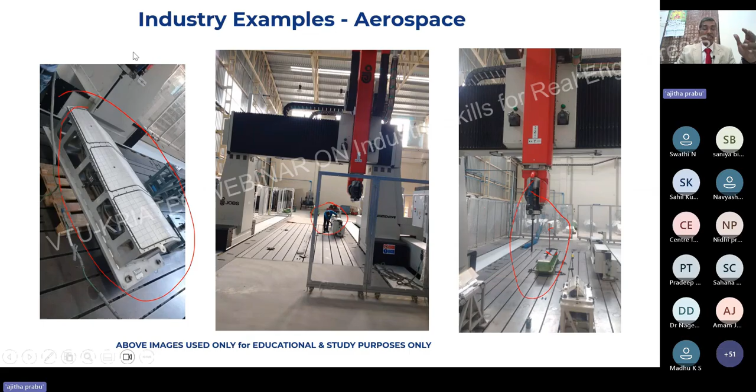Let me put forward automotive. Automobile is a very famous industry, now going through some tough time, but nevertheless I will show you some video. All this example I'm showing is real life example. Those are all our clients, Kriatec clients for the past 16 years.

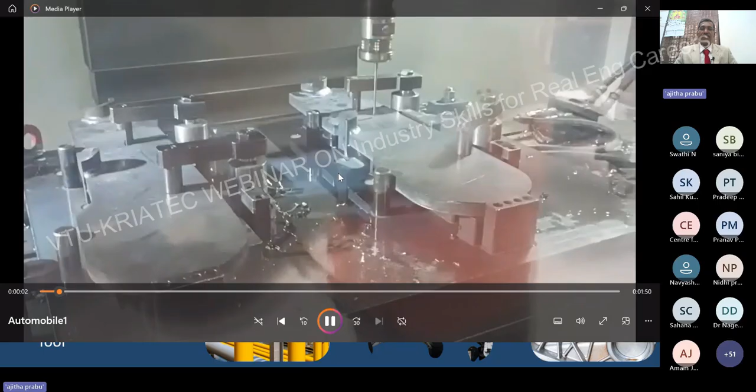I'm just playing the video to give you the feel of how the industry works. This is a two component, and they are going to inspect before machining, because today the bigger challenge is, if you look at this example, before even machining they used to inspect it, because today the automobile industry is so good. If I am machining the wrong part, nobody will pay the money. Therefore they will do the inspection before even machining.

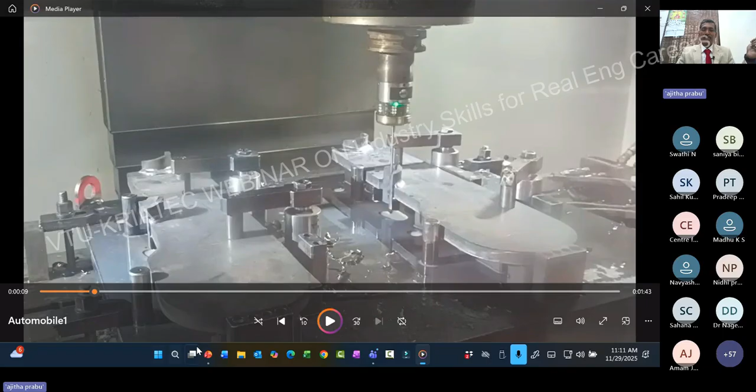Just have a look, these two are components. The industry is so advanced. Today we speak on Industry 4.0. This is a typical example of Industry 4.0. Before even machining the part, they try to inspect whether the component can be machined or not. If during inspection it is wrong, then they will not even machine it, because why should we waste the money on that.

So there is a background video coming, that's how it's clearly checked.

The objective is, there's a good word in Tamil, let me translate into English: mudal konal mutrum konal. If something is wrong at the beginning, till the end you will be wrong. In the same way, there is a book called Goal by Goldratt. It is very, very good. I recommend all my engineers should read this book. He's an Australian guy, I attended his seminar, excellent actually.

What he says is, for any critical machine you have to do 100% inspection. Just imagine, if the component is not good, there is no point machining it. So after machining, after checking everything is fine, then the machining will happen. I'll show you - I inspected, everything is fine, then the machining happens. See how smart the world is today. Earlier people used to go and do the trial machining. Today in automotive technology, I cannot afford to make even one mistake or one rejection. So that's very, very important.

And tool making - this is again one of our clients in Europe, a mold making company. They're the number one mold making company in Europe. I would like to show you. All these are priceless examples. Just trimming takes time.

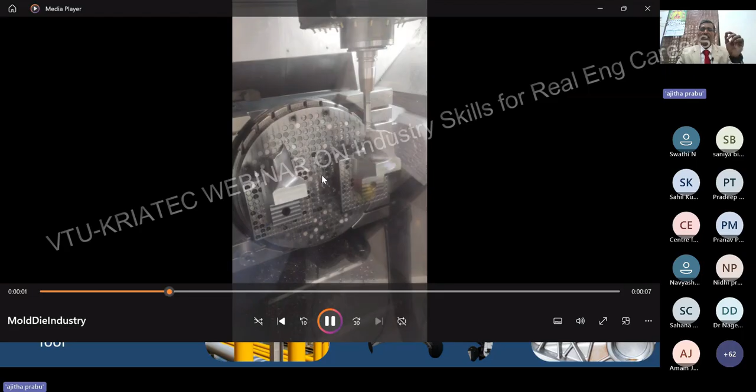This is again a 5-axis machine. Are you able to see? This company makes fog lamps, entire car lamps, and dashboards. This particular company from Europe supplies to automobile OEMs like Audi, BMW, and Mercedes-Benz. The beauty here is, for their job the next day, we used to do the programming from India one day before. That's how much the technology has improved. All this programming was done in India.

Let me show you another example. As we explained defense, there is no need to explain it further. We have a lot of defense work - HAL is available, HAL helicopter division is available.

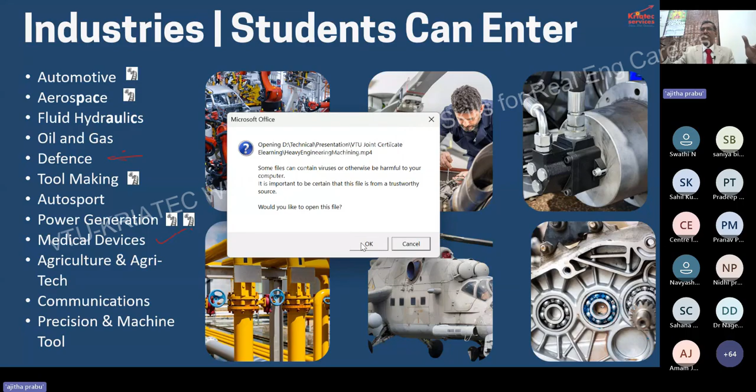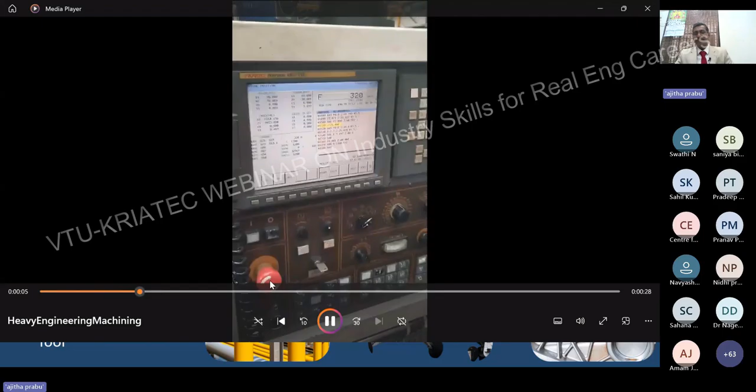See the job, again very big. No need to worry, the concept is whether it's, it's again a 7-meter length. Even when they're trying to machine this slot, the size of the job is this much big.

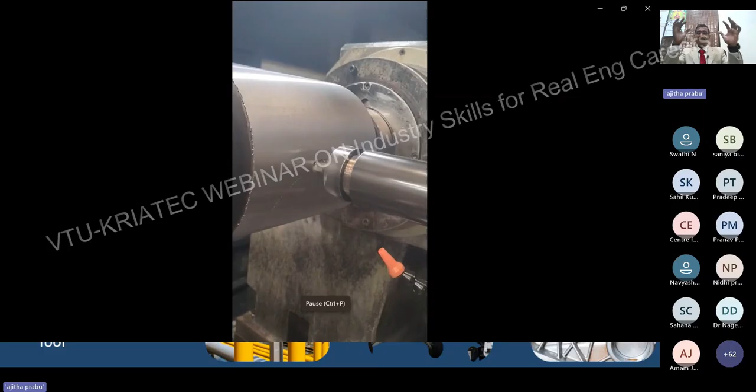For them we did programming support, CAD/CAM software was supplied. It's still able to look like a rocket - a very big part. It is coming in very huge industrial generators. They are making it - see the job, how big it looked.

Many times freshers felt very scared, because we used to also recruit a lot of engineers. When we sent them to make a model of this machine, they used to fear, sir, it's this much big.

We always tell the story that everybody knows, of Balraman or Krishna. When Balraman was a little scared, he said I've seen a ghost, it's very big - you all know the story. Then Krishna went there, and after a few minutes he came back. He put the ghost into a very small kerchief and showed it - this is the ghost. When you are not fearing, the ghost's size becomes reduced.

And that's what we like to bring to the student, to bridge the gap. Now in a couple of minutes we are going to expose what skill sets the industry is really looking at. Same way medical industries.

We have a customer called Appasamy Ocular Devices. Wherever you visit an eye hospital, they make the projection display where they show letters like ABCD and ask you to read them. Next time you visit, take a look. That company is Appasamy Ocular Devices.

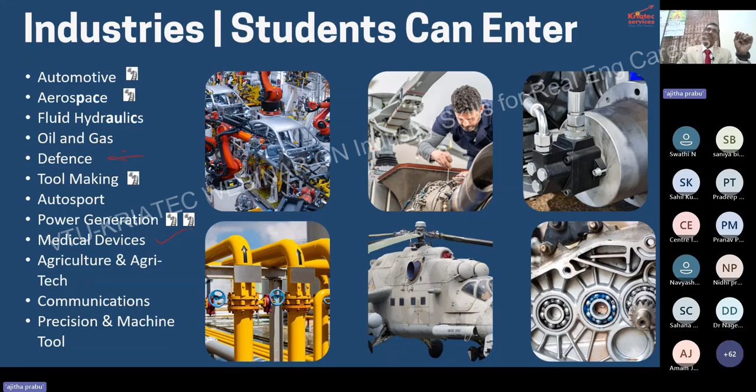ATM machines, we have customers there too. That's a huge opportunity. But what's the problem with the students?

Students always have this misconception: if you learn a software, whether it's 2D, 3D or analysis, like Fusion 360, SolidWorks, CATIA, they think 'I'm ensured, okay, I can get a job, I can add value from day one in the industry.' Let me share my own experience in a couple of slides.

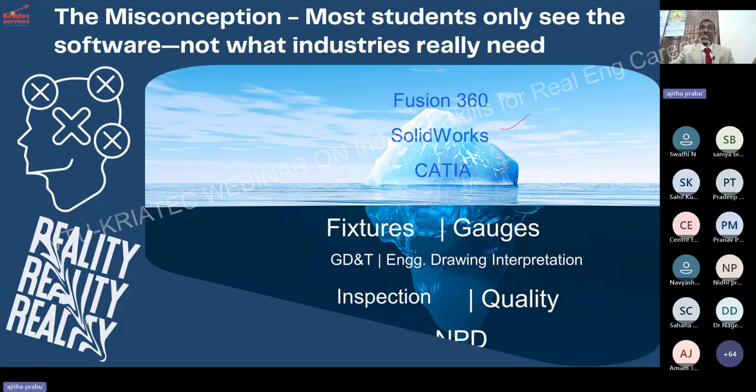I also studied at CAD Center, and at that time I spent around 30,000 rupees. I'm talking about 25 years ago, so it was a huge amount of money. I did all 5 levels there, and let me share my own experience of how it led to a big disaster. It's not really a disaster, just an entry point.

When it comes to the industry reality check, what industry expects is that from day one, the student should add value. Even now we have 2 interns undergoing office training, and we know they take time. For 6 months we give them training. That's quite common with everybody, whether it's 2 people or 30 people.

What industry expects is that students can add value from day one. And what are the skills needed? That is really the big gap between college, academia and industry. That's the reason VTU invited us, to bridge that gap through a skill development program within your engineering itself.

Many times the student doesn't know, they think whatever parts we are producing will all be accepted. No, there will be rejections. We are not God, producing parts that are always correct.

Even God sometimes makes a mistake, like some children who are physically challenged are born that way. The same way, whenever you produce a part, there is a possibility of rejection. But the student doesn't know how to analyze a rejection.

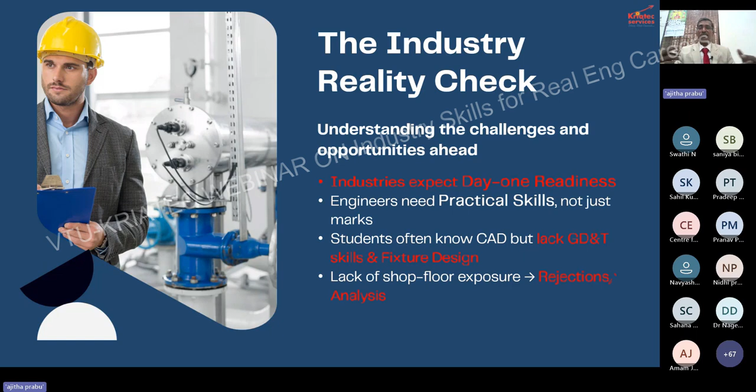Let me put forward what industry is really looking at. Industry expects students to add value from day one, just like we also expect engineers to add value from day one. But most of the time, students in the mechanical industry struggle. Even 70% of students fail in the first level technical round of interviews.

Let me show what industry expects. I'm just opening a small PPT, which we use for our own interviews. This is a typical example starting with a very small tool holder.

If you imagine the tool holder being used in a variety of industries, whether machinery or die and mold, what we generally give as a test to students who come for an interview—not just me, but any company in mechanical, consulting, or other industries—they give a 2D drawing and ask the students to make a 3D model. I don't know how many students are attending, maybe hundreds in this program.

Please do this acid test for yourself. Can you make a 3D model out of this? Can you interpret what H7 means? Can you interpret what this means? What is the meaning of this 'A'? Can anyone make a 3D model? If you are good, I'm happy.

Then there's a symbol given here, like this. What is the meaning? What does it communicate? Why are the shapes given like this? Because engineering drawing is like a language—I'm speaking in English, somebody speaks in Kannada, others speak Chinese or German. But globally, this is the engineering drawing.

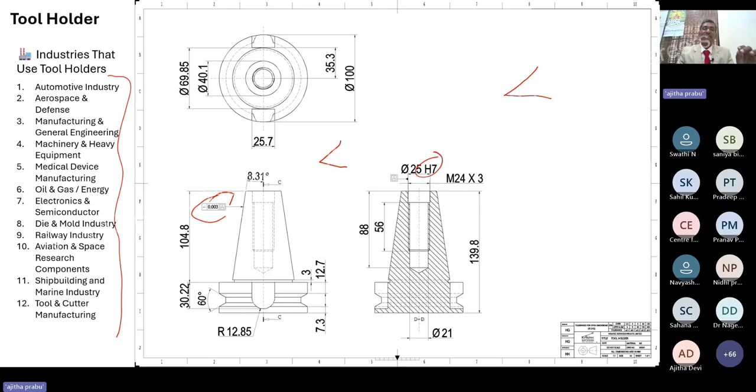From the CAD, it will give a drawing, but that doesn't mean you can manufacture it. It has to be manufactured correctly. Even here there are some mistakes. What I'm trying to put forward is, if you could all do this, this is the major flaw we find in students. Not only you, even IITs, we closely work with them, and many times even IITians find it difficult to convert this type of engineering drawing into 3D.

Let me show the answer. Whatever I showed you is a 3D. Imagine this is a 3D. It looks simple, but generally people will not give you 3D initially. Or from 3D, if you're going to give a 2D drawing, the guy who is going to manufacture this might be a small scale industry or big corporate.

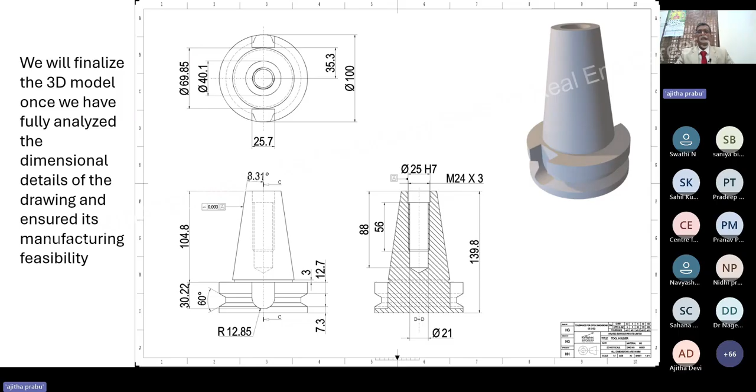They generally know that it has to be done in a proper way. Let me put forward another good example, which is a gland. The gland is primarily used in the electronics industry because today that industry is booming like anything. And for them, this is typically another drawing. How many of you engineers are attending, third year, final year, or second year? Please try interpreting this yourself. Can you interpret it?

This is what Pradeep ji is telling. When we do recruitment in the office, we find a lot of difficulties. We want to scale up our business with a lot of good service industry, but the major challenge we found is getting engineers is very easy, but getting skilled engineers is very, very difficult. That is the reason we are taking these steps.

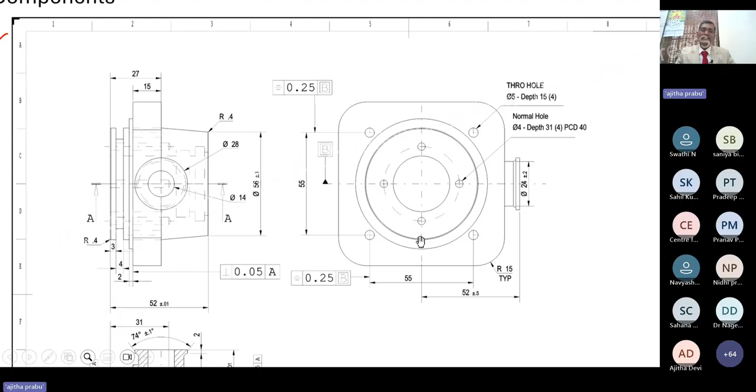Are you able to see this? Are you able to interpret it? Can you make this 3D model out of this 2D? Generally, I will share my own experience. When I joined after the CAD center, I did 30,000 at that time, spent it in 2000, then happily joined the industry.

And the day I joined, I felt that nobody in the industry will teach you. Are you able to see that? When I joined in Rane, the drawing size was like a table, my size, A0 size. I didn't know how to read and make a 3D. The task given to me was, at that time on Pro Engineer, I needed to make a 3D model. It was a nightmare for me. I didn't know how to read or interpret it.

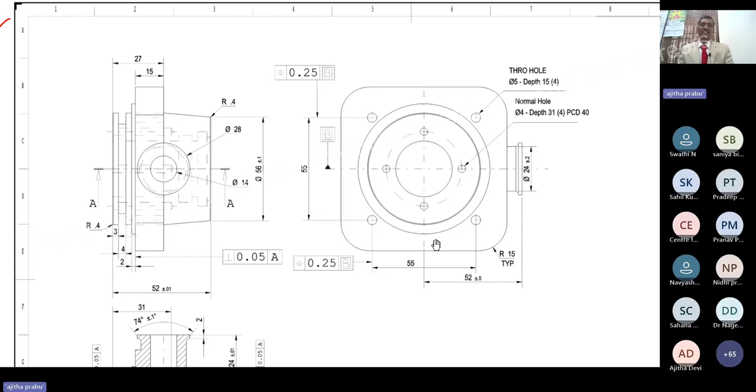This is how typically industry works. He used to tell me, he's just 3 years senior to me, but not willing to share anything. 'Oh, you are trying to depend on others. You are physically present, mentally not present.' That's the level of industry. Wherever you go, you are not going to work with your peers or same age group, but with seniors, 3 years, 5 years, 10, 15 years senior. Nobody will teach you. All this, if we want to learn in the industry, is a nightmare, and we took a step, whatever the hard way, which we don't want others to feel.

Pradeep ji, do you want to add anything more? Then I can conclude this session.

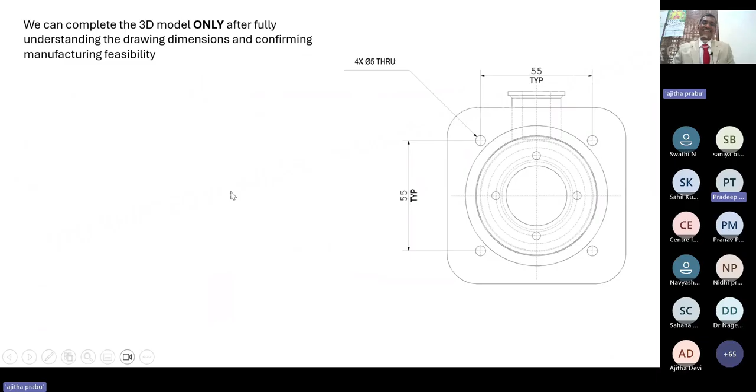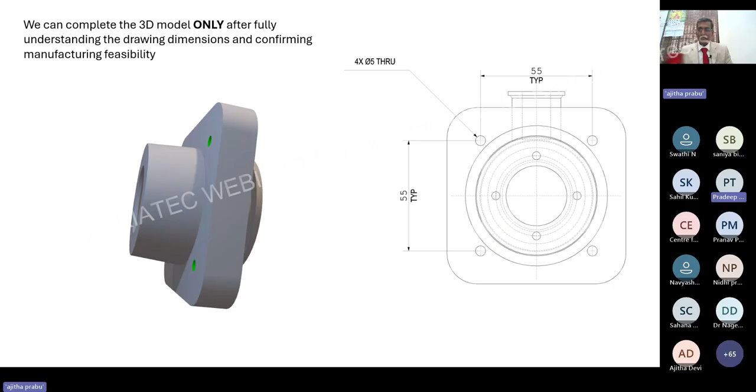I will show them the answer. No, what happens is, we think we know everything because we got good marks in exams. But in real life, that doesn't help. When we go deep, I faced one problem in my interviews. Whenever people come for interview, I give them a drawing and ask them to see what it is and pinpoint some symbols which they are not able to identify. So our courses, these first basic courses, will help engineers face interviews easily.

Yeah, Ajitha. Thanks. As we said, during my first struggle when I entered Rane Madras, I had a very bad mentor, and I also had a very good mentor. His name is Seshadri, and he made me understand. I should salute him actually. And because of him only, all these courses we built the hard way, with like-minded people, from people like Mr...

Pradeep ji, we almost worked like elephant catching. We did about 3 years of work to present all these courses.

Next is fixture design. Again the student thinks, design is what? Many students, when you interview them, say they want to go into design, but they don't even know what departments are available. I'd like to show you, because there are two different departments available: one is product design or component design, and the other is manufacturing engineering design.

Take an example like Rane Madras, they make steering gear. Product design is different. To manufacture the steering gear, you need big setups. Like BEML is also our customer - to manufacture aerospace parts, you should have a big process. In that, fixture plays a very major role.

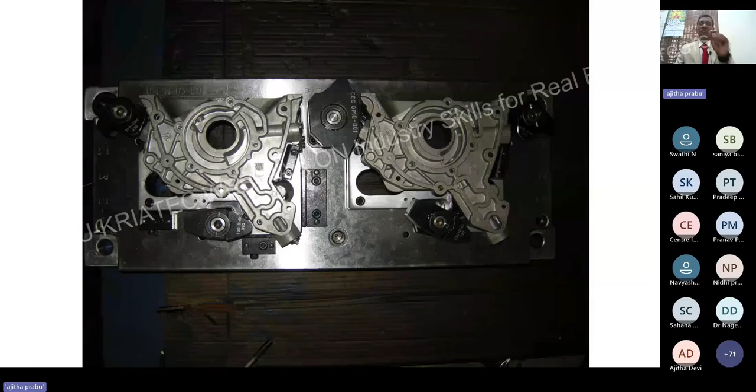But unfortunately, I'd like to show you some of the fixtures being used in the industry. All this you're going to design. If you only know 3D modeling, you cannot do the design - 3D modeling is just making a shape. As I said, 15 years before I also learned CATIA or Pro E, but what's significant is how to design.

For this, this is a component. First you should differentiate - this is a component and this is a fixture. When you join any company, they expect the student to do fixture design. What is the fixture? Everything I'm going to share in the next couple of slides.

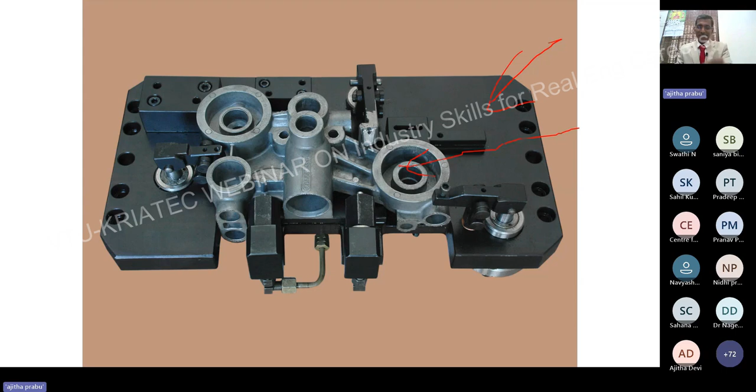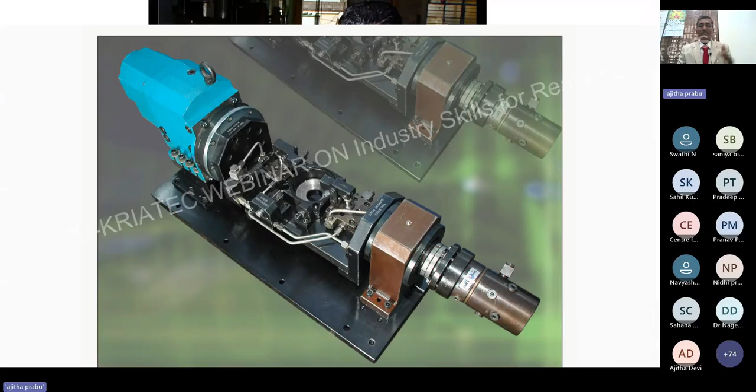And these are all the fixtures. Fixture is basically to hold the workpiece during machining. See how big the size is. You see some shapes - what is the meaning of all this? Why did they keep the shape like this? Why is it round? Why does the shape look like this? All this the student has to think about and do the design.

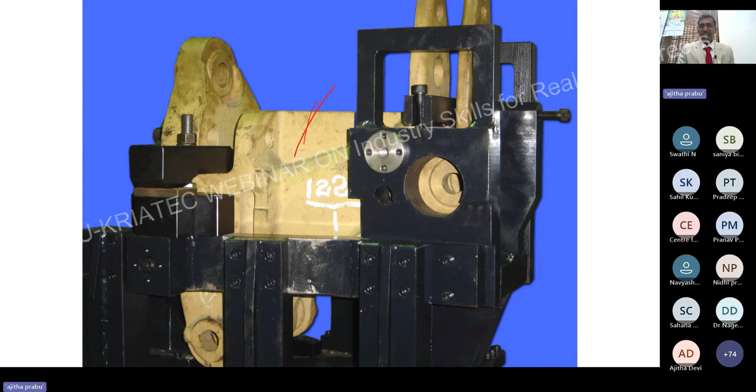It is really, I'm telling you, in the same way you have different clamps - manual clamps, hydraulic clamps. This yellow color is a component and the black color is a fixture. Can anyone say why this is black color? It is rust prevention - because the fixtures, whenever you use them and keep them on the shop floor for long, the material may erode, so there is surface coating to be done properly.

Again, this is a component and this is a fixture. All these industry experts - if tomorrow you know 3D modeling, can you do this? I am sharing my own experience.

We now also have an open offer from Tesla. I was just discussing this with Prakriti madam - do you remember, madam? Last time I asked you, we have an open offer from Tesla from when I visited the US last October or November. We got an open offer from Tesla asking if we can develop a pressure die casting die design course. I identified the resource, but we want to create 10 industry examples. We're still creating it - it takes a longer time.

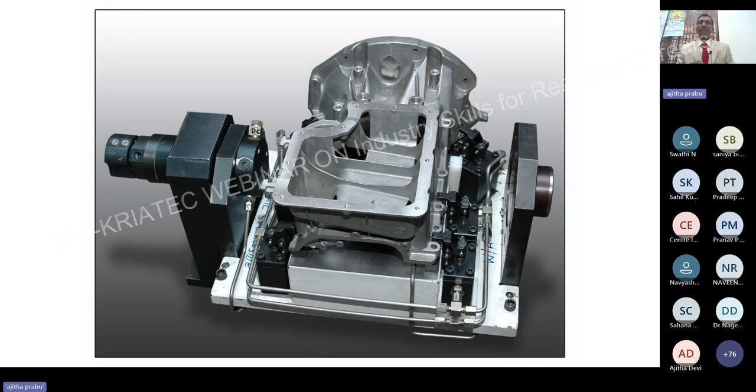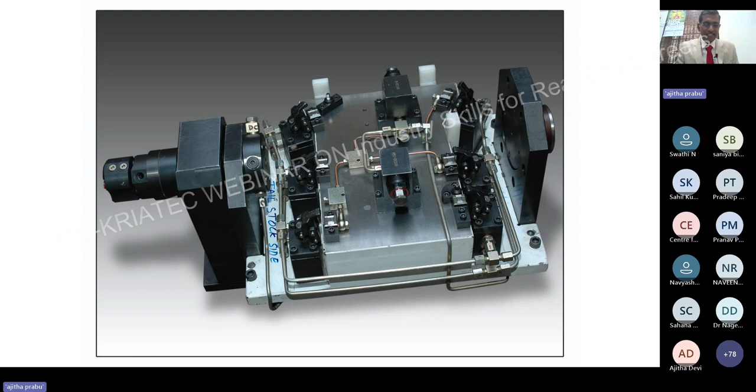And that's what I'm telling you - every industry struggles, like with fixture design, every industry struggles to find the right people. What we are saying is knowing 3D modeling is basic, but why the shapes look the way they do, all this is designing. Many times we find people don't know what fixture means, and I will try to cover it.

So these are all simple examples of industry fixtures, which we expect industry-ready students to add value from day one. Let me put again what Pradeep ji shared, with the merit. Let me add one small quiz just to make a difference.

What does industry really expect? Let me put this - so this is a drill. I'll share my own experience. We supplied CAM software to many educational institutions, and we sent 3 colleges' students to one industry called KJK Meisterhonen in Chennai.

For campus placement, they asked for 10 people, then 5 people, so we sent 10 engineers. The company makes honing tools. The MD asked them, what is the meaning of honing tool? The students didn't know what honing tool means. He said, 'Arey baba, what is this?' Then the students started complaining, 'Sir, my college did not teach us all this.'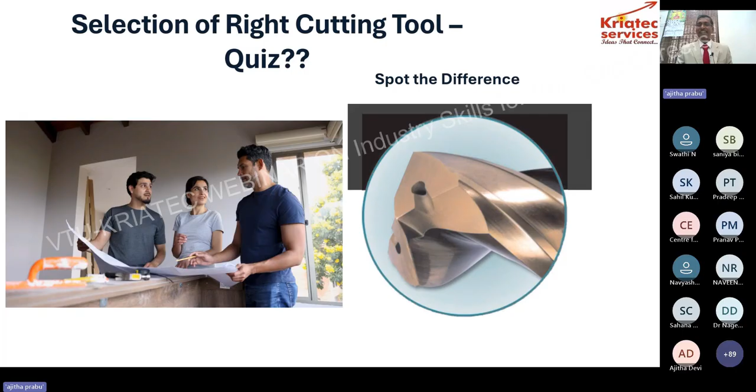So when they go for an interview with any company - if somebody comes for a Kriatec interview, they should know what Kriatec is doing and they should be prepared. And let me put forward something related to this.

Can you just spot the difference between this? Both are drills - can you look at the cross section? What is the difference between this and this? We manufacture this in our Coimbatore plant. These are all the things which are missing from the student. This is a reamer, a drill-cum-reamer.

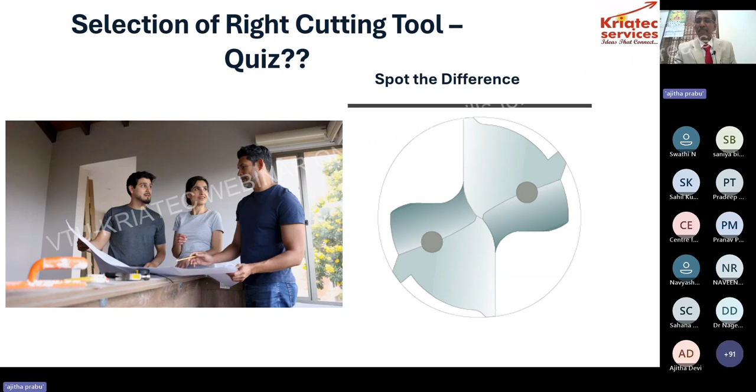There are 4 cutting edges, and many times students don't know the difference between a drill and a reamer. All this is a skill gap which we found. What we found is most students don't know what departments are available in a typical industry. That is the reason we listed the departments available, like R&D and production.

Many people, if you ask any mechanical engineer what divisions are available in industry, they say there are only 2 divisions, R&D and production. Am I right, Pradeep ji? Generally if you ask people, they don't know beyond that, I can say for sure.

So if you say both R&D and production together, they contribute only 30% of the job opportunities. But production engineering contributes more, vendor development or supply chain management contributes more, and quality too. Let me share my own experience.

Hello? Yeah, it's fine. Pradeep ji, would you like to add anything on these departments?

I knew only production and finance. But when I entered Rane, I found there are so many departments which help production and in turn get business for the company and make profit. Without profit, companies will not survive. So there are many departments which help production meet their targets, right?

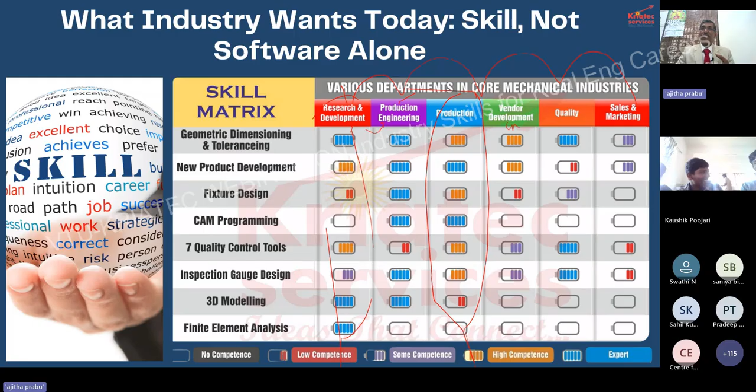Let me share another example. Like quality, Thomas Prakash Manoj, who joined with me, maybe 1 year senior, is from Sathyabama or Hindustan, I'm not sure. He is now heading the entire Ford factory in South Africa. That's the level of these people.

And in production engineering, I'm running a business. It doesn't mean that the student, many times, doesn't know what departments exist.

Again, I would like to put forward, please take a screenshot of the earlier one and decide in third year itself. We will give you the roadmap of which year you can do which course. The moment you get a skill, you can add value from day one, even in the final year internship.

What we found is students think that if they learn a software, they can get a job in the industry or add value. But industry expects end-to-end competency, and the missing link is real world application and practical exposure. That is what VTU and Kriatec bring you through this course, and we'd like to run a small AVI file to show that.

Generally, we started this course initially to train our engineers, because we used to supply them software, probe, cutting tools. We have 300 plus customers across the world, and many customers, if they want to use CAM or cutting tools, they need the training. They need to know how to read drawings, and that's the reason we started this course.

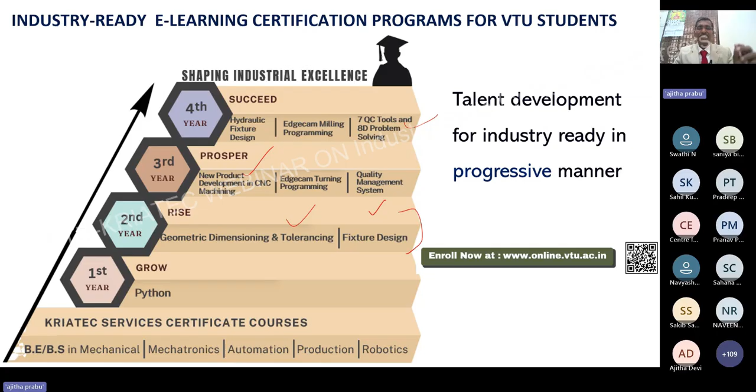And if somebody is in quality, they need to know GD&T and 7 QC tools, NPD, very very important. Somebody wanting to go for new product development or PED, they should undergo GD&T and fixture design. Likewise you can go. So let me just run through GD&T.

Again, there is a special request from VTU, we have adjusted the price. The industry price is 10,000, with the student we are giving it for 2,000. The moment you are out of VTU, then you have to pay 10,000, and you need to pay. So this is the registration link.

Let me just show the video, how it looks like, the course 2.

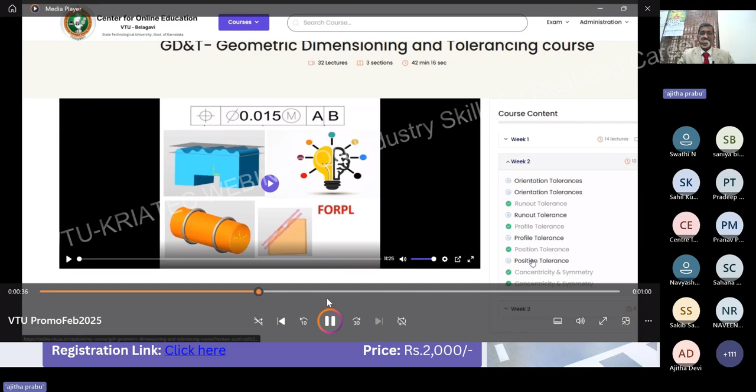This is the first webinar we are trying with VTU, because many times students don't know the meaning of fixture design or GD&T until they go to industry. By the time they complete engineering, they should know this, and we should appreciate VTU for taking these steps.

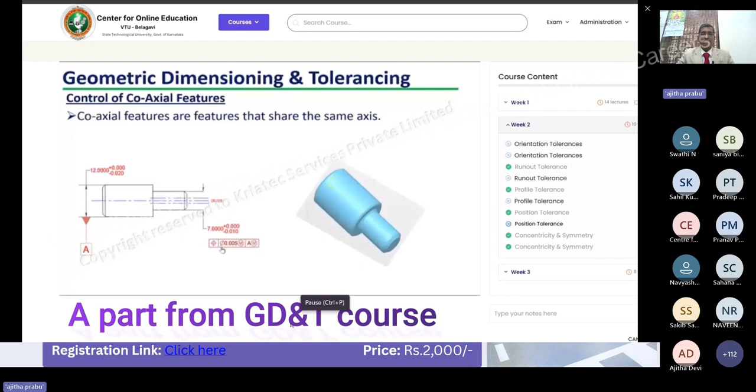In this diagram, the bigger diameter 12 and the smaller diameter 7 pin both have the same axis. This is called coaxial features. So how are they going to be controlled, when we control the bigger diameter and the smaller diameter? In this diagram, the feature control frame is attached to the smaller pin.

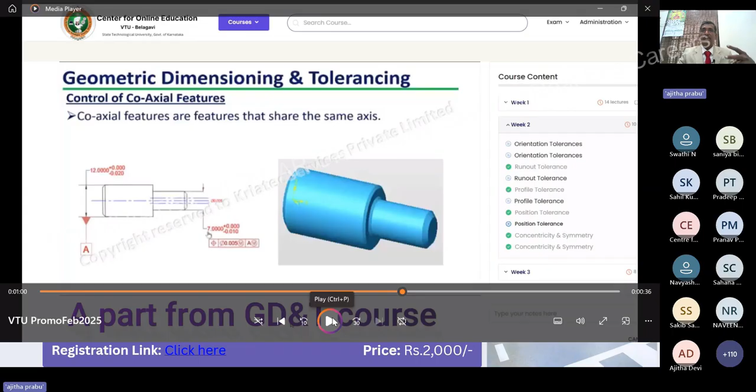We built our e-learning platform, thanks to Ajitha and their team. In 2015 itself, we built a MOOC platform and created this course, and each course takes a lot of time, and they should attend the test.

Let me just share what your objective should be: not to get a certificate. What we expect is, people generally think that when they go to an interview, they show their certificate to prove they know GD&T. No, that's not what we want.

Let me share my own experience. When I completed my engineering, I scored Centum in Mathematics 4, which covered Laplace transformation. When I went for my first interview at a company called Indra Industries, in Ranipet near Vellore, I met the MD named Punnusamy. He interviewed me and asked what my achievement was. I happily said I secured Centum in Mathematics 4. He asked what that was, and I explained it involved Laplace transformation. Then he told me about a new industrial chimney, sometimes 100 meters, in this case 20 meters, where heavy wind comes, and asked if I could do vibration calculations using Laplace transformation. Could I have solved that problem? No, because I studied it in my fourth semester, and by the time of the interview in my final year, I had forgotten everything. My mind went blank, and I told him, sorry sir.

That's the reason we give course access for 6 months. Please don't just aim to get the certificate - get the skill set. Once you learn the skill, let me share another experience. I didn't know swimming, but a few years ago I wanted to become an Ironman, so I learned sea swimming and practiced for 6 months. Then I participated in many events, including one near Mysore at a big lake, and later in Goa. That is a skill - even today, if you put me in the sea, I can swim. That's the skill set I'm looking for from you.

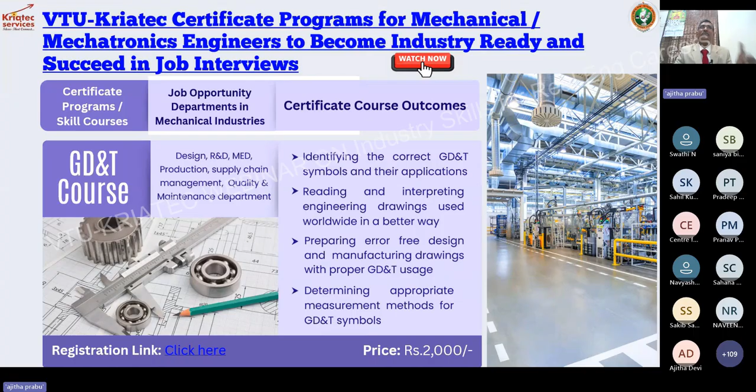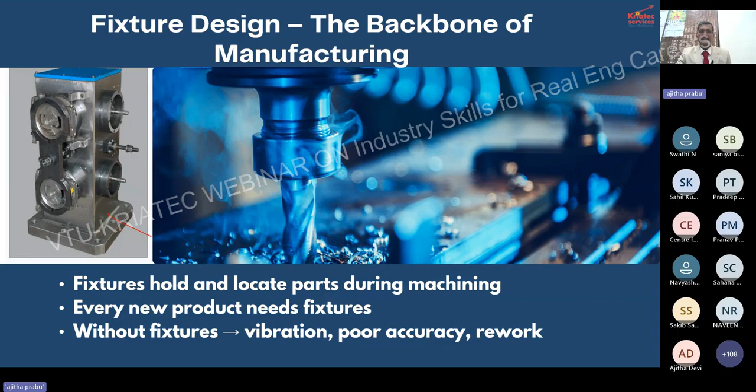The fixture is very, very important. If we want to manufacture this particular part, I cannot hold it in hand on a CNC machine - I need a fixture. As shown earlier, this is a component and this is a fixture. The fixture has to hold the part. Every time, if you are using a vice, it becomes a problem. I'll show you - if you use a vice and tighten it too much or too little, the outcome will be affected. Let me just run this video.

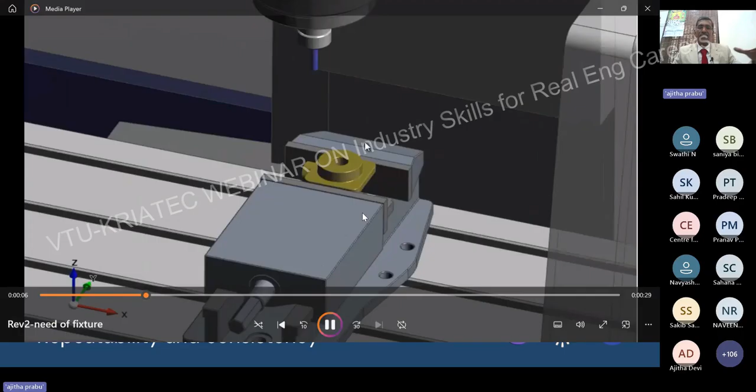If you use vice, you cannot produce mass batch production. Every time you have to do dial, you have to put job zero, or it's a very tricky one. This is again from CAM software simulation. When I'm trying to do the drill, after some time what happened? I have not tightened fully. I learned from the mistake. Now I'm trying to tighten too much. Then what happens? The outcome will be damaged.

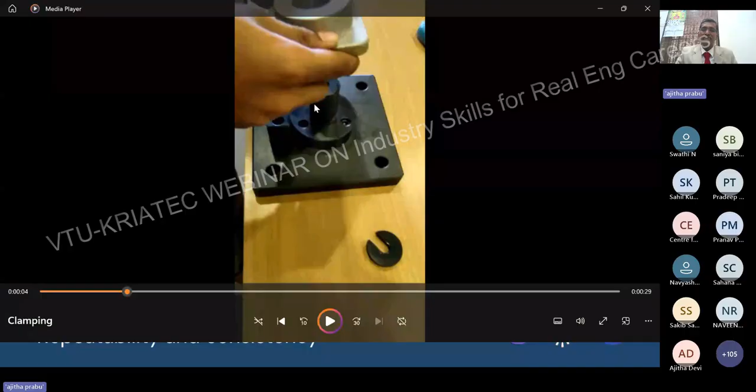But imagine to do this very simple. It's a fixture which we have been taught, or we are going to teach you and explain in our courses, step by step procedure. It's a simple fixture. Can you imagine why the shape is not round? We have answered, the airlock will happen. So that's the reason you have to give some different relief for that. Day in, day out, you have to load and unload. The moment you clamp it, there is a C washer, there is a meaning for the design.

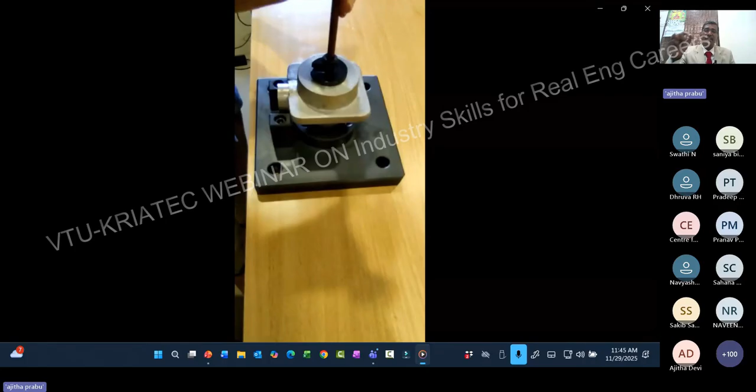This is to do that particular component machining 4 holes. This is a fixture, and in our courses we covered, likewise, 10 industry examples. Our motto is, if a student learns these 10 fixture examples, they can add value to anything. Imagine, even if an earthquake comes while machining, nothing will happen.

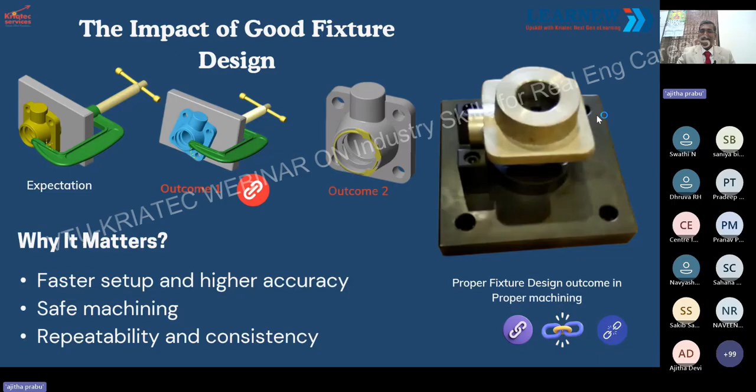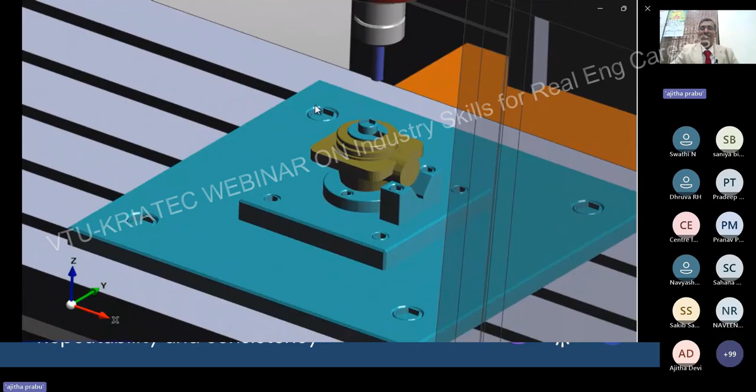We are going to see the machining now, how it happens. This is what we are making the students understand. You can learn any 3D modeling software, you can use SolidWorks, Pro-E, CATIA, but the concepts - why the V shape, why not U shape, what is the angle of V - you should learn from our courses, which we learned the hard way from the industry.

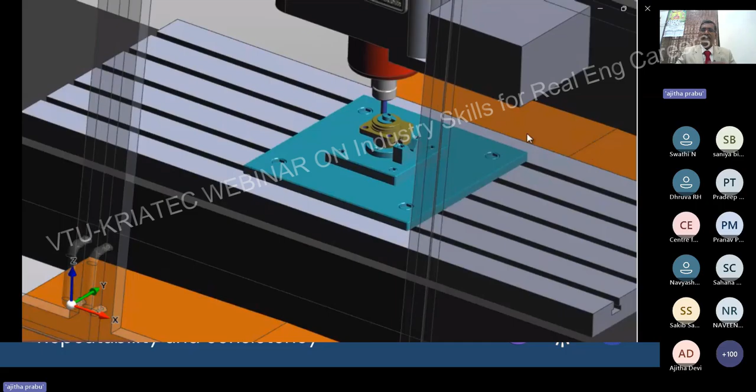Earlier people used to say you have to learn only in Gurukulam, but today I'm very happy that VTU is bringing a lot of initiative. What industry expects, we are trying to deliver at your doorstep through e-learning, and that's the advantage. We update very quickly. Now, earthquake comes, tsunami comes, anything - the job still runs very good.

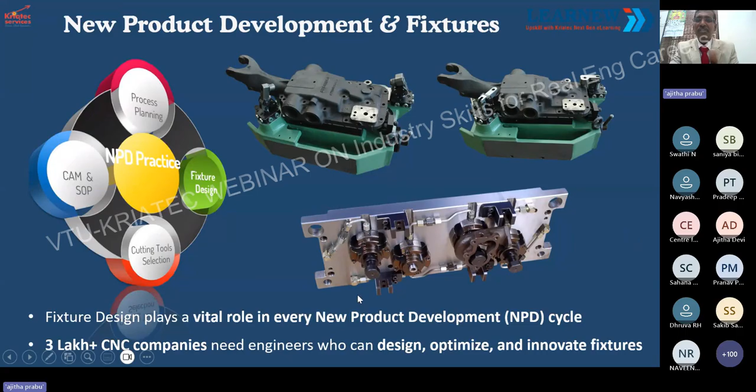Let me just put forward - these are all the fixtures which we expect the student to design in a new product development role. Any new product development needs fixtures. And in our courses, all these fixtures, whatever we are explaining, are shown on the screen.

We used to tell them what are the do's and don'ts. Generally, in life, it's not always good to only teach them how to do it correctly. We also explain how to do it wrong. Then only you realize what happens if you do it wrong.

And this again we picked up from one of the government accounts, from Central Tool Room, Bhubaneswar. His name is Mr. Subhashis Mohanty. When we were trying to do some programs through industries, he suggested this to us, and likewise we always put it in.

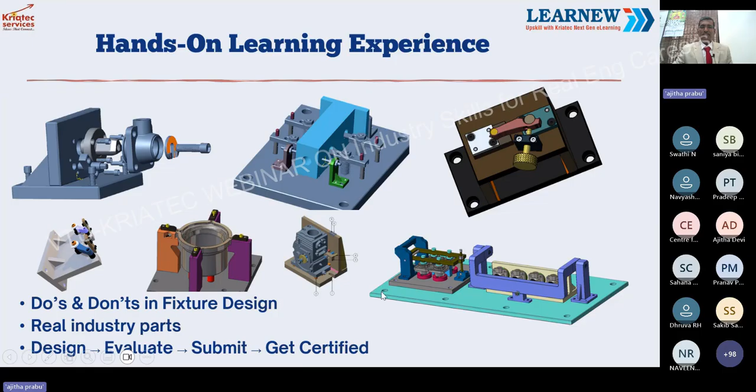Let me just go on to the next one - NPD. Again, if you go and click the link, I'm just showing you the live link of VTU. Sorry, it has to open. Yeah, it's opening. If you go to online.vtu.ac.in, you can find it. Oh, I opened too many, sorry. So this is like online.vtu.ac.in, you can see that.

Okay, let me just wait, it's taking time to stream. I can go ahead to the next one.

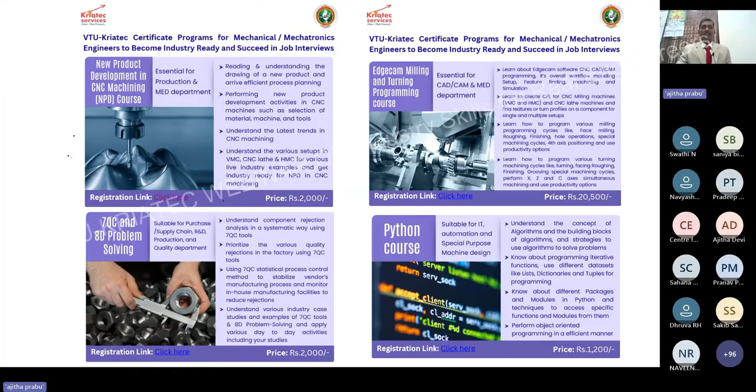You could have asked us, why don't you do direct training? I still remember when our team initially met, they asked us to go near Hubli and do direct training. But we said no, we cannot do that. Then afterwards only we met Prakriti madam, and everything got, I can say, full steam ahead.

Then we launched the course. The very important thing is we had a clear motto, because we are already running a business and we want to do something good for the society and for our own clients of 300 people. That's where we launched this e-learning course. The advantages and disadvantages - all these things you cannot learn in college. It needs a lot of experience, a lot of examples, which we are providing. And the student can learn it 24/7.

Let me parallelly show you - yeah, this is the online.vtu link, and you can go and register for this New Product Development in CNC Machining course, and go ahead and register. Likewise, you can go.

The objective of this is, again, if you go with direct training, I can even vouch for it - if you have 3 professors, everybody has a different method of teaching. But when we went into this, we had a very clear agenda.